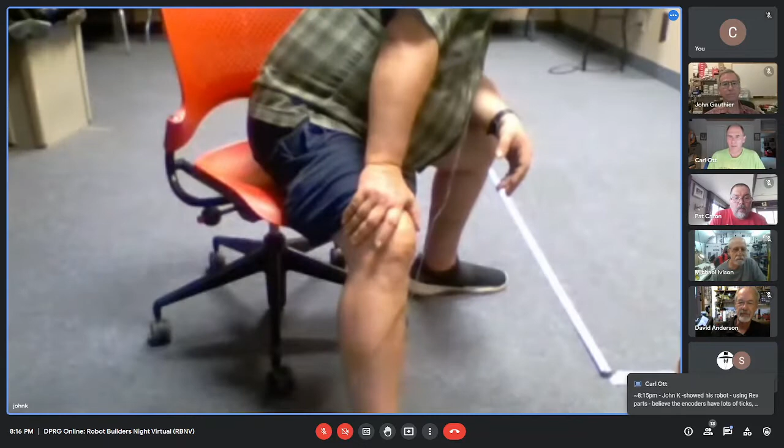Hey, does my air conditioner sound pick up? Nope, okay good, you're probably hearing the fan here though. No, I'm just hopefully not. Okay, I just don't want then noise. Hopefully this will. Yes, I think I heard a 3D printer or something from John G. Oh, I better, that's me, I'll silence it. Okay.

So there's where I'm at so far with it. Well, but he gets a gold star example, doesn't he? He definitely gets a gold star.

You know, one of the old mottos of the DPRG was, well, it worked at home. But we really can't say that anymore, because we're in your home right now.

Show it to us. So there's number 2. It should do better, but for some reason it wants to go left a lot more than I thought, so I must have changed a variable recently without realizing it. It tends to be at the same spot right now, so that's good.

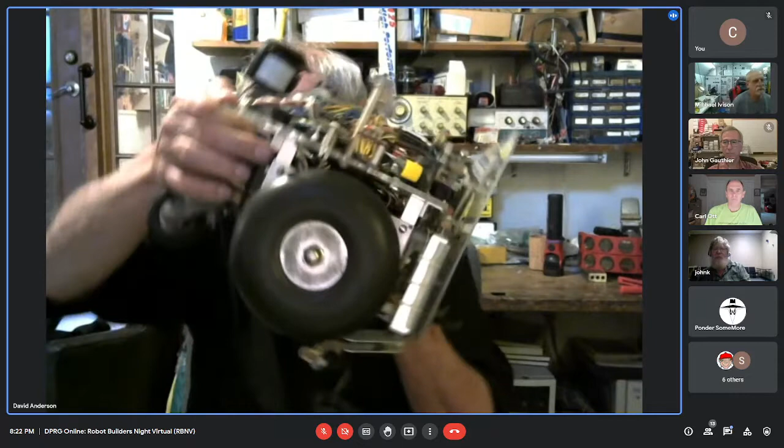Like this, and that would make the laser draw a line on the floor, so I could get a quick reading. Yeah, but that's always the problem - how to do the initial orientation. It would be nice if you had sights, or could sight across the robot, like a gun.

I like to use, in the building I work in, 1-foot square tiles, which you can use like a big piece of graph paper. What I do is put the robot down centered, so the axle lines up with one axis and the center of the robot lines up with the other axis. That's pretty repeatable when you want to run tests.

Another reason you may want to oversize it from what the cones are actually set to, is that if you're oversized, it doesn't really matter if your square isn't quite running with the cones - you're still going to do your square and come back to the same spot. Whether or not you ran the square parallel to how the cones are set isn't part of the score. So you just look at what you have to do, which is really just come back to the same spot and not go inside the cones.

You can also get lasers that project a line as opposed to a point, which you can mount on the tools. You can get those on Amazon very easily, they're like $5, something like that. So that's a handy thing to have. That's some good advice from all of you - I've got some of those little lasers somewhere.

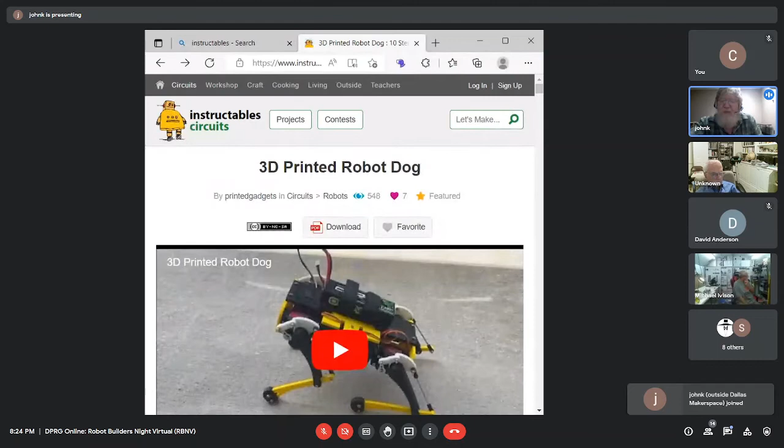So I have another thing to show besides that. Let me show you this, because after the contest, this looks like a neat thing to build. I saw this the other day, and they actually have a video out on it now. What I like about it is the design where they put the servos, because instead of having them down in the bottom of the leg, they have them both up in the body. It's an interesting design how they did it.

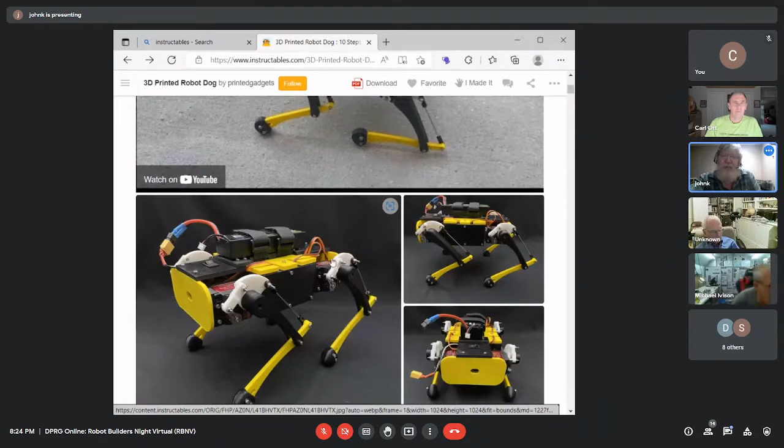I don't know if this one shows you a better close-up of the leg or not. Nope, I don't. Okay, but I'll run the video and you can sort of see how it looks.

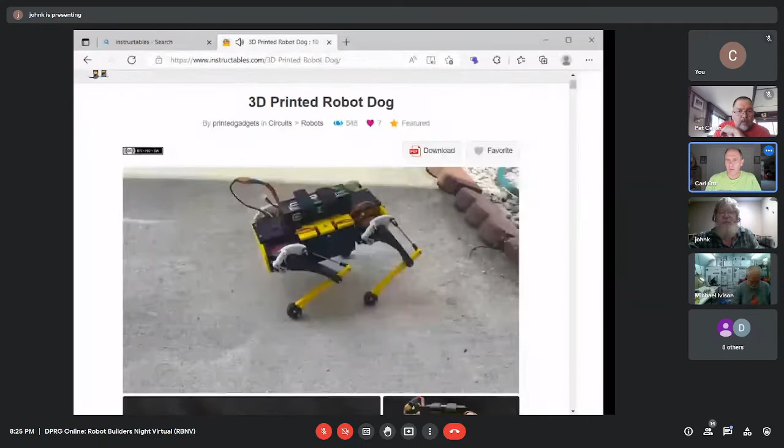But to me, the only thing is I think I would enlarge the legs a little bit to make them stronger, because they look pretty thin to me, just eyeing it. But I do like the fact that the servos are all up in the body instead of down below.

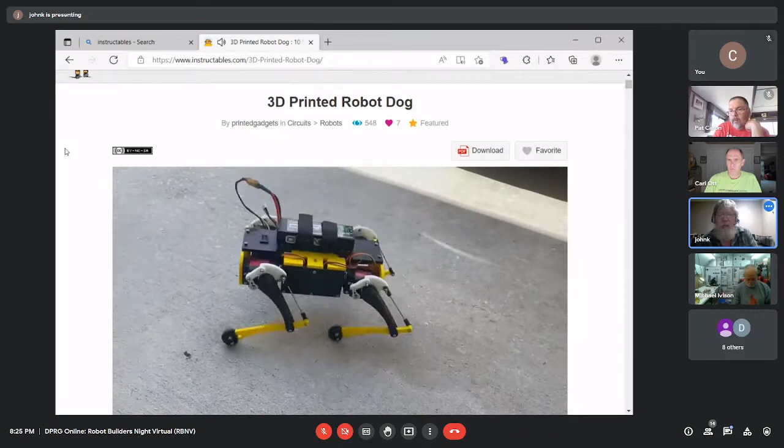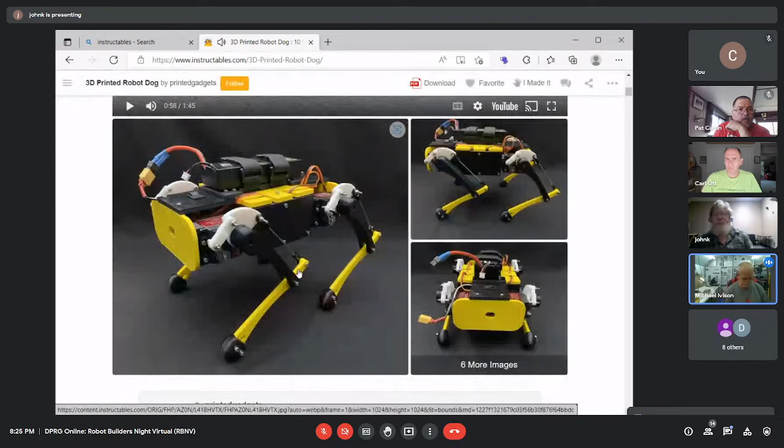So, yeah, I thought it looks pretty well designed. I haven't really gone through this one, but I think he describes it all pretty well on the electronics.

Is it me or is the quality of these Instructables just increased over the years? Well, some are, some aren't. I've seen some bad ones, so yeah, this one's pretty good though, it looks like. Seems like more and more of them are better, easier to find ones like this where they've really put time into it. But yeah, this one he's definitely took some time to get it done right.

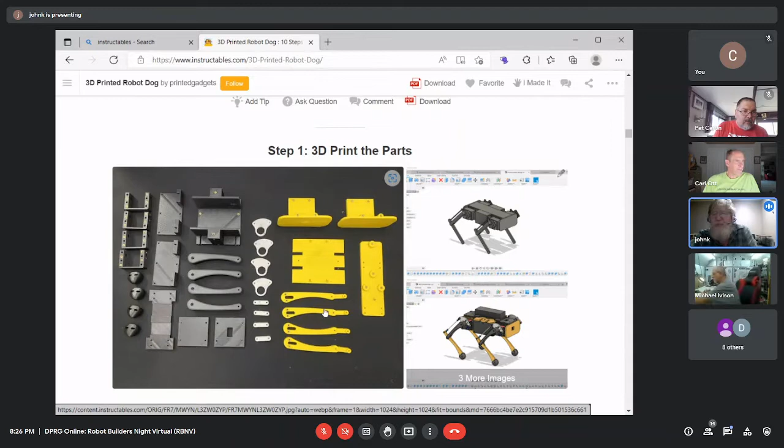I mean, yeah, from what I'm seeing, how many servos does it use, John? I think 8, because basically 2 per leg, so that'd be 8.

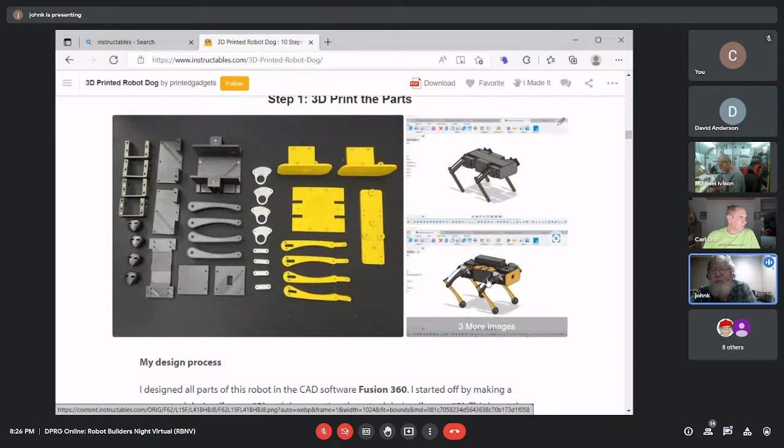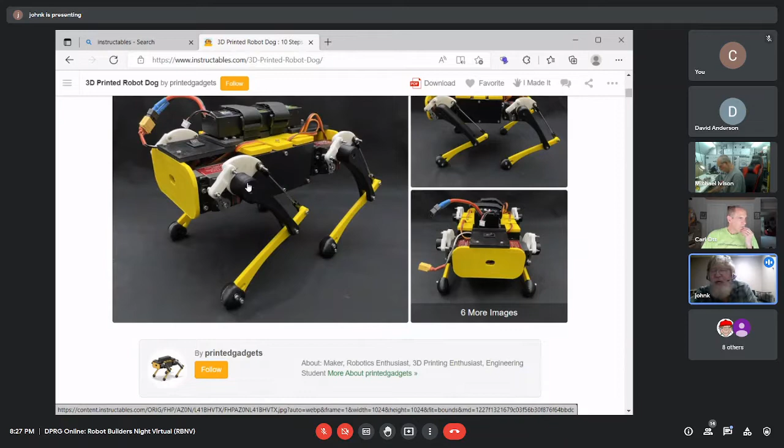But let's see, somewhere in here. Okay, well, he has 12. I don't know where he... it looked to me like he had a shoulder as well that was pivoting in and out. Well, yeah, you have the one for this linkage, and then you have that one, so that's where I get 2. When you showed the video, it looked like the shoulder was pivoting in and out, so that would be a third servo.

Maybe, I haven't looked real closely at it. It doesn't really walk very well, does it?

No, and that's why I said I'd make the legs stronger. I think they're a little thin, that's the problem.

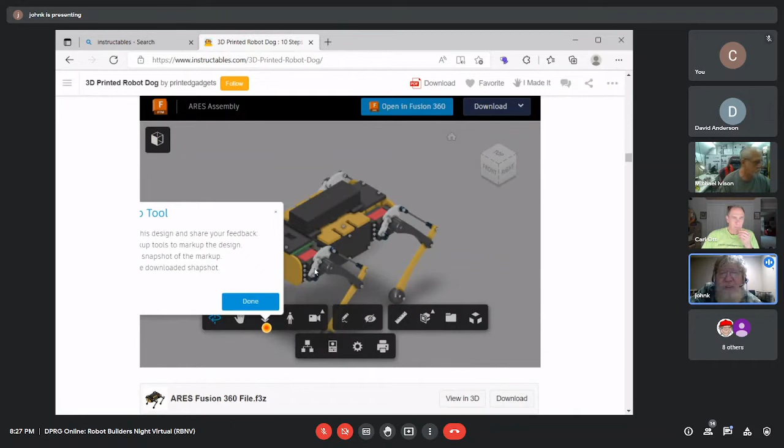Well, let's see, yeah, there's 1, 2, yeah, there may be a third one. You might see this linkage right there, could be the third one maybe. Okay, well, here's the leg, so yeah, he has 3 motors.

Let's see what his 6 more images were. Yeah, well, I was thinking it was down below, but we'll see. Oh, he actually maybe have... let's see what this one shows.

Yeah. You'll have to get one of those 3D printers that print titanium.

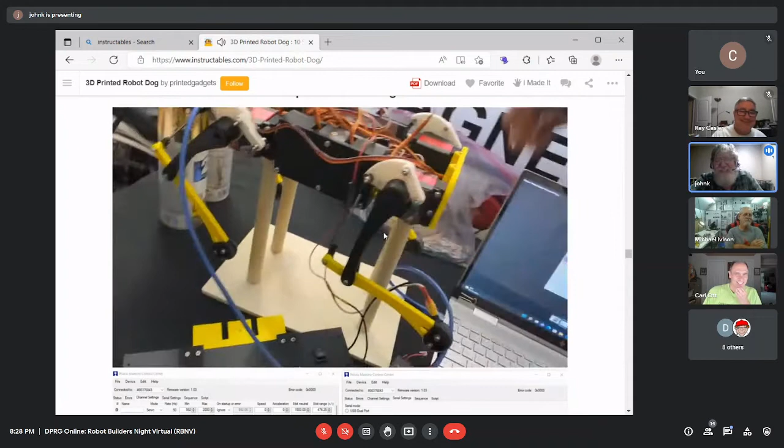Yes, or at least Ron's carbon fiber one.

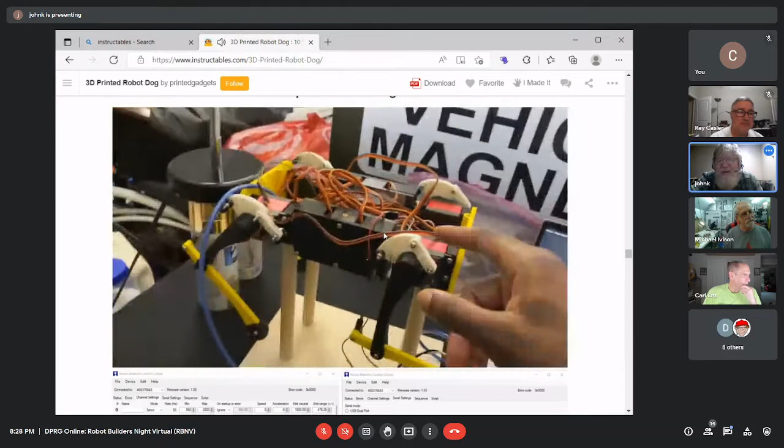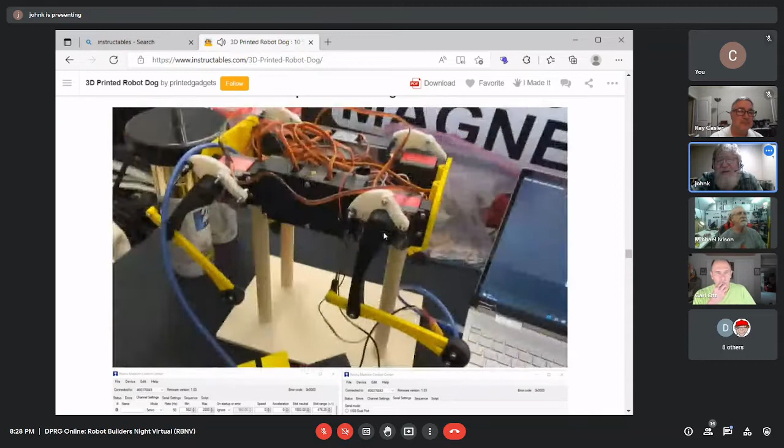Okay, so we're going to do that for all 12 of the servos, but I'm going to only show you how to do it for the first leg, so that's only 3 servos. It's the same for all the legs, so once you know how to do it for these 3 servos, you can do it for the rest. All right, so let's get started.

And you want to mess with them full time. I think the third one may be to push the whole leg out. I'm thinking so, yeah, oh there's one right there. Okay, first one, yeah right, that's what I was saying. There's a shoulder joint that pivots in and out. Yeah.

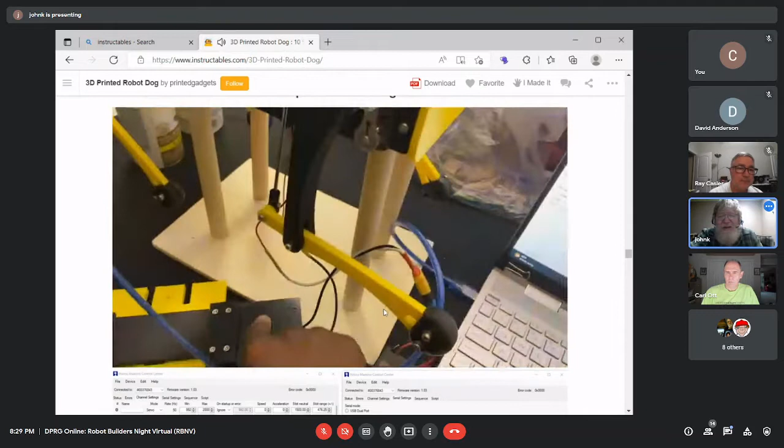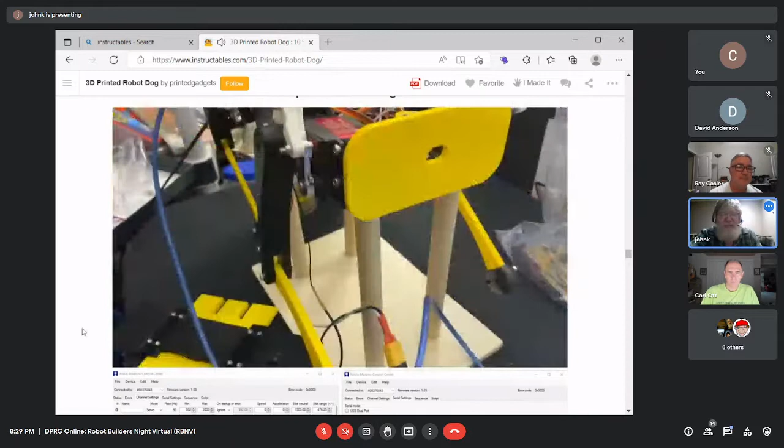There we go, okay, that's where it is. So you have one to turn in and out, a good spot where you show it. Okay, so yeah, it's one for there, one to rotate the back left and right, and one to go in and out. So yeah, that's the thoracic. He uses 3 per leg, so that's how he can get that. That's some complex servo diddling right there. So yeah, that's how you can get it.

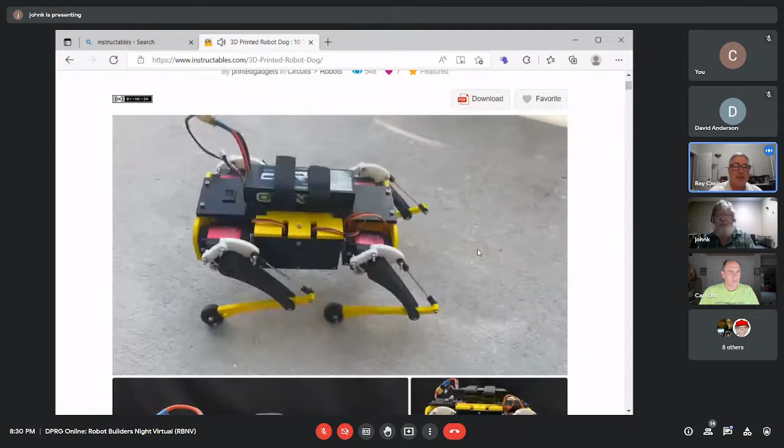Because yeah, eventually in the video he shows where it leans to the left and leans to the right. Well, they'd use that in rotation as well, right? Yeah, like the old mime thing, see there, and that's where you get the third movement. So hopefully that's why, before Christmas, I can build that, but we'll see. Because this one looks pretty cool and it looks like he's done a pretty decent job. The only thing is beef up the legs a little bit.

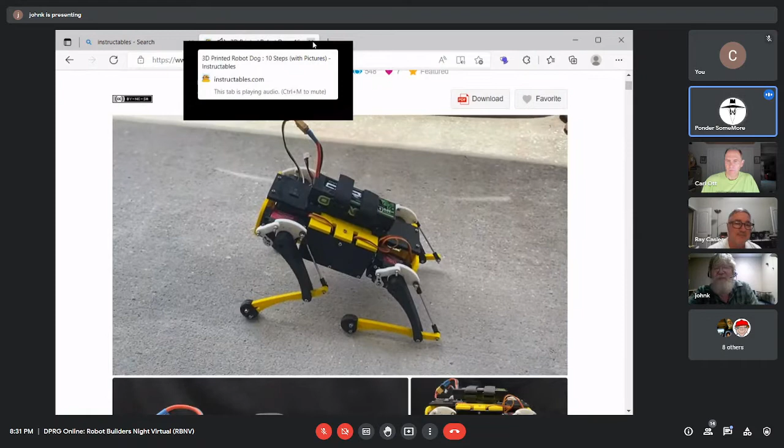At the risk of starting a whole side discussion, I never got the idea of why you'd want a robot with legs. Wheels are so much better. Amen. We can't have wheels on us because there's just no way to articulate them. But if we could, would we go back to legs? We got them as soon as we could. Exactly, but you can go over rocks, over things. Have you ever seen a legged robot climb something that a rock crawler couldn't?

Better than that, do you know what trials are? You know those guys on motorcycles that jump on top of boulders and stuff like that? Those are wheels. I've never seen a robot come anywhere close to doing anything like that. When I brought this up before, and I'm sure Kareem has heard the same thing, it's always pointed at mountain goats and things like that. But the thing that's missing is the controller. That's what makes mountain goats able to climb those vertical surfaces. It's the brain and the sensors, not the actuators. If mountain goats had wheels instead of hooves, they'd still be able to do it.

Gee, as long as they could. Well, that's what I was saying. That particular robot, we should be watching a Boston Dynamics or something. That one didn't walk very well, and I imagine that's its software. Even Boston Dynamics, I've never seen them, like when they do demos of Spot going through broken caves and things like that.

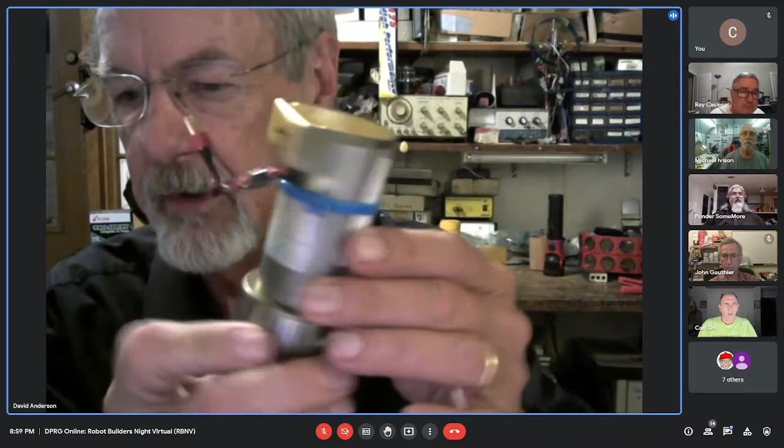Right, that looks remarkably like, here's a Pittman motor, here's the piece you just 3D printed, and the light cover, and that's your— can you see it there? Right, that's your HEDS.

And these are 500 count, I think. Are they? Yeah, yep. They make some really high counts. And the other option, this is still in the bag.

I don't know if you can see these or not, but those are the— let's see if I can get the light right here. These are the magnetic discs. They have 10 pulses per revolution, and these are the Hall effect sensors here.

A little printed circuit board from Pololu, and those aren't bad. But of course, you're getting 10 pulses on the A and B channels, whereas the other ones you could have 500, so quite a bit more resolution on it.

So I was fitting these to the back of these motors. This is kind of the little platform piece. It's just kind of friction fit, if I can get it off.

Well, anyway, it just kind of looks like this. It's got two little mounts that have two holes on it. It's just a press fit on the back of the motor, if you can see it here or not.

Anyway, so I was just hot gluing the magnetic sensor on the back of it, and had planned to use those. And if that didn't work, I was going to go to the higher resolution ones.

And that's on. Well, this is here. But on this platform here, extend this out, turn the light on so I can get it. Here, okay, so let's see, where am I? Okay, I guess I gotta switch cameras. Okay.

I had some success. I'm having an issue where this motor, on the motion control software, it's indicating that there's a short. So I don't know if it's an issue with one channel of the controller or the motor. I've got to get another motor on here and see if it goes away, or if it is a problem with it.

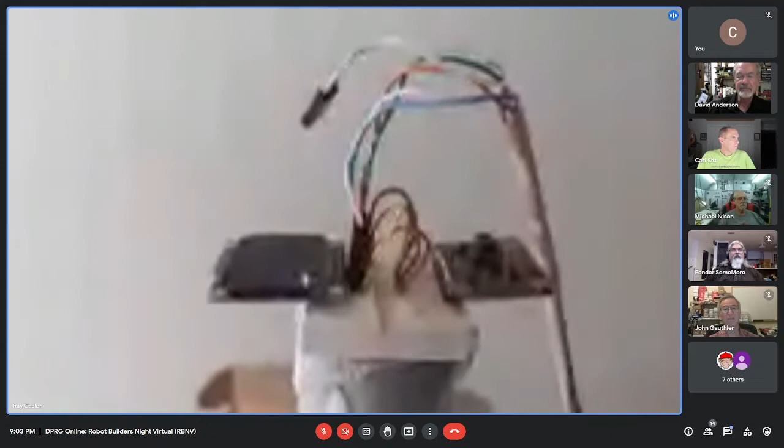But anyway, so they're chain drive. The two wheels are just tied together by sprockets there, and so it's kind of left side, right side. And on the top here, I've got a BNO055 and a little OLED display, so I can see what's going on.

But I had connector issues. I crimped a bunch of the pins off the encoder, and that was just junk. I basically ripped it all off and replaced it all. I still have the short issue, and I've got some mechanical issues like these. I needed to stick shaft collars on the shafts, because otherwise the whole wheel can slide out, but it can also slide back in if it slides in too much.

Sorry, the wheel is right here. Sorry. Oh, that's okay.

Oh yeah, for the... your robot's core is giving off an EM pulse, it's completely canceling your electronics, connecting to the internet. Ooh, it's part of a plot. You're pulling my leg. Anyway, that's the tinfoil hat, let me just turn it off.

It needs basically the heading that the BNO055 gives, and then do a 180-degree turn and basically go back and forth in a zigzag pattern. I can get it to do that, but I still have an issue with one motor, and still have a couple of mechanical issues that I basically have to take it apart and put shaft collars in, so the shaft is constrained in both directions moving in. Right now it can only go so far out because the sprocket holds it in, but it can go inwards, and I've got to stop it from doing that.

So I probably should put some nice... I didn't think it would be an issue, assembling everything. I machined all these brackets to hold the motors down and to hold the bearings in place. I don't know if I'd ever do that again, it takes a long time. Anyway, so that's kind of where I'm at.

There we go, I'm back on. Hey Ray, to hunt down... what? You said you needed a new motor, or you could just switch them, couldn't you? See if that's the problem. Yeah, I was... and you don't even have... yeah, it's kind of a weird issue.

It says there's a little flag on it, overcurrent, and it says it's drawing hundreds of amps out of the battery. I'm not certain. I don't think that battery could supply 100 amps instantaneous. It's like a lithium-ion battery, so it's kind of weird. I'm hoping it's not the controller. Is it a 20C, 30C, what C is the battery?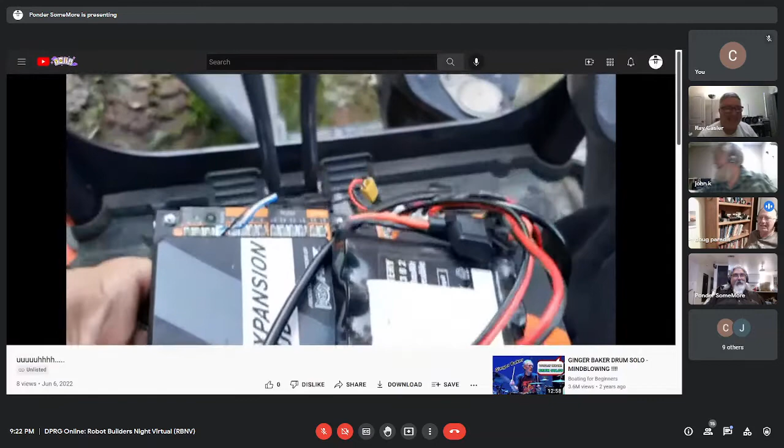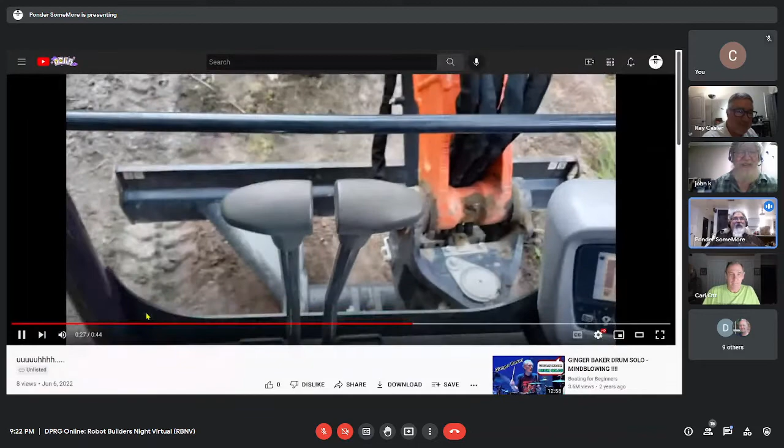Are they all gonna scatter? You'll notice I don't have my hands on the... Oh, that's hilarious, can't turn right. There you go. Oh, you're doing it with your feet? No, they're doing it, we both... oh, they're doing it. Yeah, my feet are solidly on the floor and my hands are not on the levers. Oh, okay.

So, damn, that is risky. So we also beat Ray out in terms of scale right there. That's a 4-ton excavator. Yeah, it's a 4-ton excavator. I haven't counted the degrees of freedom on it. The next step is to see if we can actually control the arm itself. Have you tallied the number of safety violations?

Is it OSHA that governs this? I don't know, it's on private property. It's not OSHA because it's not a business yet. And Kareem, you're the safety operator, right? Yes, there are two safeties - one disengages the hydraulics, and the other kills the motor.

How can that be more dangerous than a self-driving car, except much more deadly and heavier? It's like watching an episode of Mythbusters. Well, a wonderful use of cable ties. So Mythbusters, are we going to see this excavator blow up? Well, that would be nice.

We got to take it to the local quarry and put some C4 in it. So did you actually modify something you rented? No, we did not. This is all rental agency sleight of hand, right? This is all video editing to make it look like something.

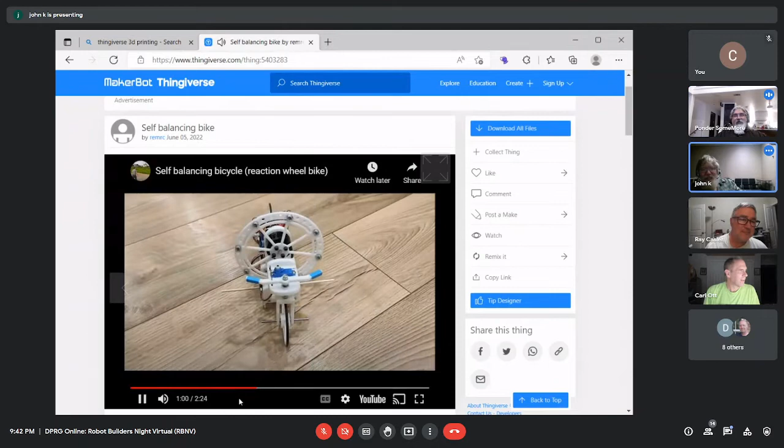That kind of works against the concept of a bicycle, because you want to lean to create a turn while you're moving. So, can it turn? Yeah, eventually I think in the video he shows that a little bit. Yeah, there, you can see the wheels moving. But you're right, so isn't it using precession?

Looks like it doesn't lean when it turns, not much. It looks like it also doesn't have any caster in the front, doesn't have any rake in the front wheel fork. Oh, you're right, you're right. So it's not a very good bicycle.

But it's a lot better at standing still and not falling over than most bicycles are. I like the simplicity of it. I've been thinking to build one of these for a long time, but now I don't have to.

Someone else did it. It's relatively simple, I mean just look at the simplicity of the mechanism. There's not that many parts to it, and it's cheap parts at that.

Let's see the ping pong ball juggling robot. Yeah, where was that? Okay, we'll have to find it. Oh, I'm just teasing, John. Oh, that was good, last week, wasn't it? He was actually going to show you one.

So, which one is it, oh, that one? Okay, I'm curious a little bit. They're going to have an advertisement. Oh, that's what we were talking about last week, that you should be able to catch with just a flat plate. And they're using, well, I guess, who knows what, OpenCV or something, but...

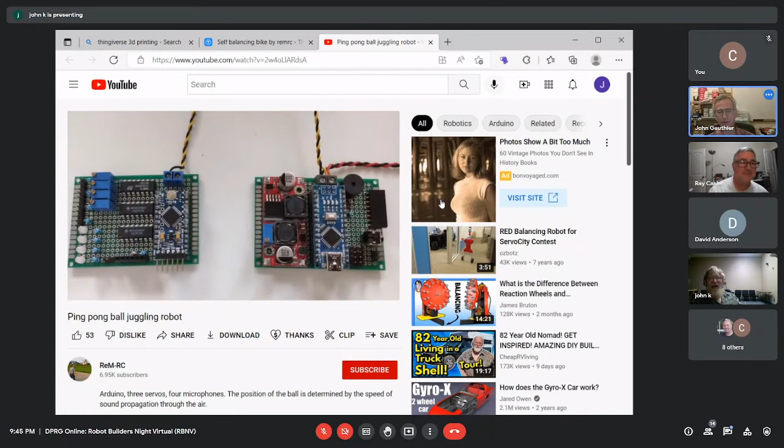Kareem, I don't remember if you were here last week. Did you see that with the tennis players catching balls with their tennis rackets? They can just catch them. Evidently it's a skill, yeah, I've done that. We can, yeah, I mean, I used to play tennis, and I used to be able to do that.

So we were talking about, we had a video of Federer and Nadal catching, and it never touches the rim. It's just that they're able to decelerate at exactly the right speed and exactly the right angle, and the ball just comes to a stop. So we were saying you should be able to catch a ball without having to have a hand, just by having a flat plate, if you know the trajectory, if you can match the speed.

Did you see the one that was recently released by the guy who's been doing all of those basketball hoops, moving basketball hoops? Nope. It's amazing. Let me see if I can find it quick. We had the moving dartboard.

But Carl, you're right, there's not many parts to this bike. Not many, surprisingly.

So I'm assuming the thing on the bicycle is just a gyro? It's a reaction wheel. Yeah, basically a gyro, yeah. But he also has to know the angle in order to know which way to spin the reaction wheel, so there has to be some sort of IMU or tilt sensor or something.

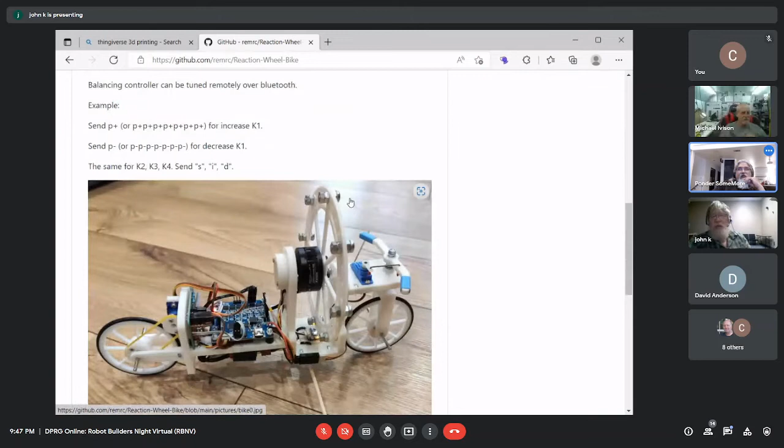But that's how all the satellites control their orientation. There's the GitHub for it. So yeah, it was the Stuff Made Here guy. I'll paste it in the chat. You guys should really take a look at this, because in terms of control theory and stuff like that, it's pretty amazing what he's done.

Is that what you just pasted in? I just pasted in, yeah. Oh, you did a different one for me. This is the latest version of his series. You want me to show it real quick, or are we still looking? Sure, why not? It's a long video, but I'll just show you a couple segments from it.

Show us the best parts. Well, I don't know that I have them properly queued up. So...

But he says it's a 100-mile-an-hour hoop, and it is definitely fast. This hoop can move in 3D to correct your lousy shot. When it's all done, this thing is gonna sink all the shots. Well, except for the ones my wife shoots. Was that supposed to happen?

This hoop is the conclusion of an arms race between me and... He always does very detailed explanations of all of his methodology, without getting into completely the nitty gritty details. And he's good at showing his fails. But let's see if I can find some.